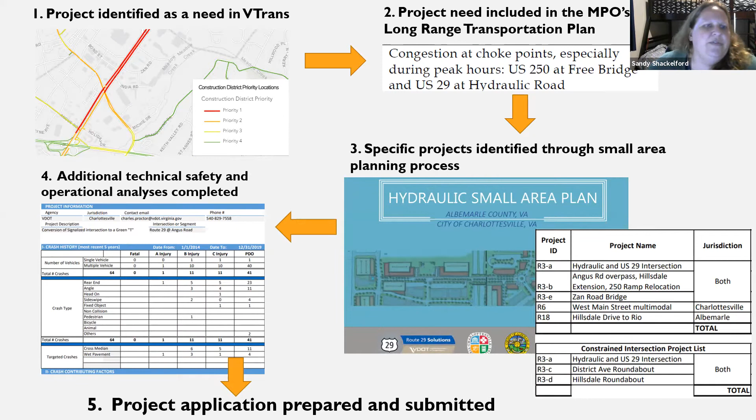After we developed that small area plan, this is just a sample of the type of analysis — this is one part of it, one page of a safety analysis. There were a lot of other analyses completed, and then we were able to submit the project application. So that shows you a project that went through that whole cycle.

Again, looking at our timeline, you've all seen this before — we're in May right now. So what we're doing through you all and with the localities is finalizing the projects we're going to ask the policy board to consider for smart scale applications to be developed. We're going to finalize that list this month, and then in July, during the next policy board meeting, with your recommendations, we're going to ask them to select which projects they want us to move forward with.

Just as a reminder, the MPO has stated it's our policy that we will support up to 2 projects that need a higher level of stakeholder engagement. So it will be up to the policy board in July, with your recommendations and MPO tech's recommendations, to let us know which projects they would like that engagement to occur on.

The other thing I want to mention is there's a possibility, as we consider projects, especially looking at the corridor projects, that maybe we don't want to pick one from each of these categories. Maybe the recommendation to the policy board is that we really want to focus on one of these corridors and do 2 or 3 projects within that one corridor. That's something you all can be considering if you'd like to make that recommendation to the policy board next month.

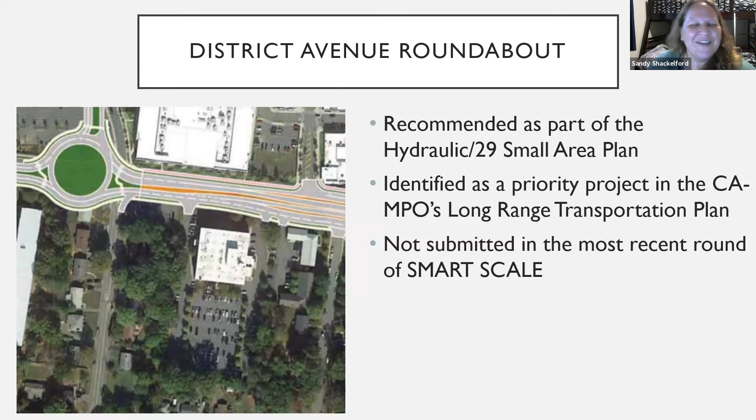No. Okay, we can come back. The second project is the Hillsdale Avenue extension. This would be extending Hillsdale from the current stopping point, over by the Kroger, down to 250, making a direct connection with 250. The other important thing we would be doing is closing these ramps between 250 and 29. So those ramps would not be there, and all of these traffic movements would then be directed through this new connection.

Again, this was one of the projects recommended through the Hydraulic Small Area Plan. It's one of the last projects on the constrained list. This was submitted as an application during our last round. It was the first project that was not recommended for funding, so if there was one more project that could have been funded, this one would have been it.

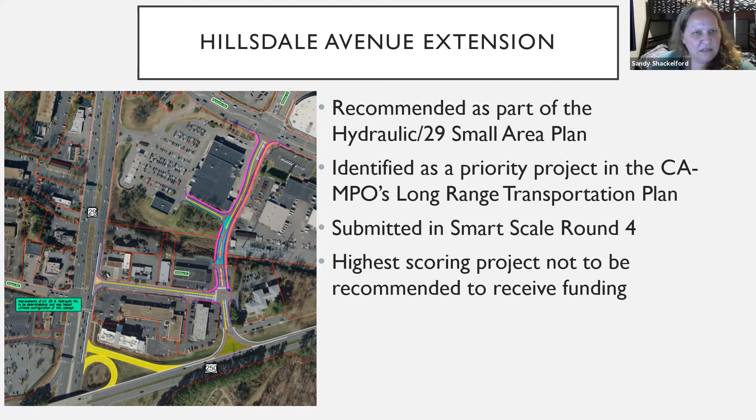All right, and then we get into the Rivanna River Bike and Pedestrian Crossing. I think most of you are aware that we completed a feasibility study last year, funded by VDOT, looking at some potential bridge configurations to provide access from the Woolen Mills area over to the Riverview Park area generally. So these are very rough sketches of potential bridge locations. These were the two potential designs sort of recommended by the technical stakeholder group that reviewed the project options.

For a variety of reasons, if this moves forward as a Smart Scale application, we would be really looking at the configurations, refining the design, and determining how to incorporate any sort of bridge that we feel is the best fit for the community with the larger transportation and pedestrian network.

Chuck or Jessica, anything you want to add on this? I mean, we've got two options. We may be looking at a third option, but the bottom line is we need to hone in on which option we want to go forward with, and then refine that option to give us the best results, taking into consideration some of the other items we might want to look at, especially from the aesthetics perspective, because that can change the cost and feasibility of different concepts.

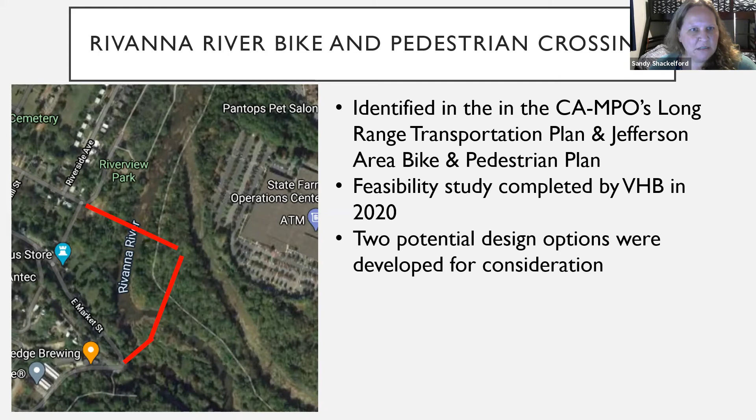And that's part of the process moving forward that you're laying out, Sandy. Yeah, that would be part of what we would have to do as part of the development process to prepare for the application.

So the next project we're looking at, these are less well defined because they're looking at larger stretches of corridors. The first one is the section of Avon Street and Avon Street Extended, basically from Mill Creek Drive at the south end to Monticello Avenue, so it goes from the county well into the city. The city has identified pedestrian and bicycle infrastructure improvements in their bicycle and pedestrian master planning process as a high priority. And Albemarle County just recently completed a corridor study on this in 2020 that identified some additional improvements.

So what we would be doing, if the policy board selected this project and you all recommended this project to move forward, is really looking at what all the recommendations are through that corridor and picking out a package or two or three, depending on the guidance we're given from the policy board, to develop applications that we think would be competitive. So we might be looking at a section of corridor improvements with intersection improvements or something like that, but finding ways to put specific projects together into an application that we believe would be competitive.

One of the questions we were asked at the public workshop was whether we could do one application with all of the projects within this corridor, and we could do that. The challenge, though, is that once we start putting a lot of projects together and looking at longer stretches, it does increase the cost of the application. So we always do this - if you'll recall, Smart Scale is based on the overall benefit score relative to the cost. So we always have to keep that evaluation criteria in mind in order to make sure that we are moving forward projects that are going to be pretty competitive for funding.

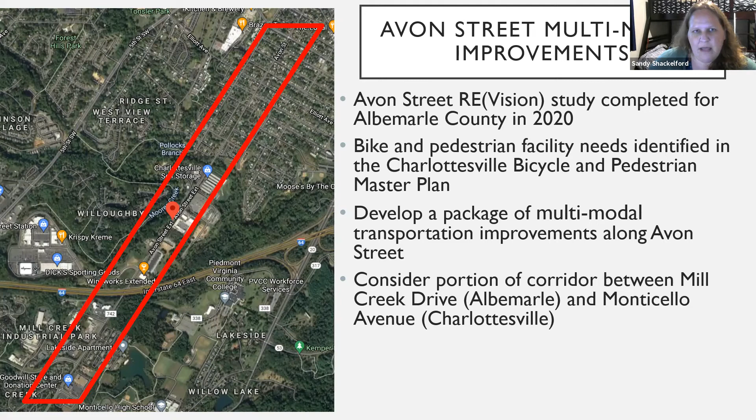And then the last project that has been recommended by staff for consideration is this 5th Street corridor, again looking at starting at the south end in Albemarle County. This is Ambrose Commons Drive. I know this is kind of small text to read, but starting at the south at Ambrose Commons Drive and going up into Charlottesville into Harris Road.

And again, it's the same thing - we would be looking at the entire corridor and putting together a package or two based on the direction that we get from the policy board on creating packages of projects that can be developed into an application. So that is what we are recommending based on that project pipeline that staff discussed when we were developing these recommendations for consideration.

At this point, I'll be happy to answer any questions, or Chuck or Jessica may be able to help as well, as open it up just generally for discussion.

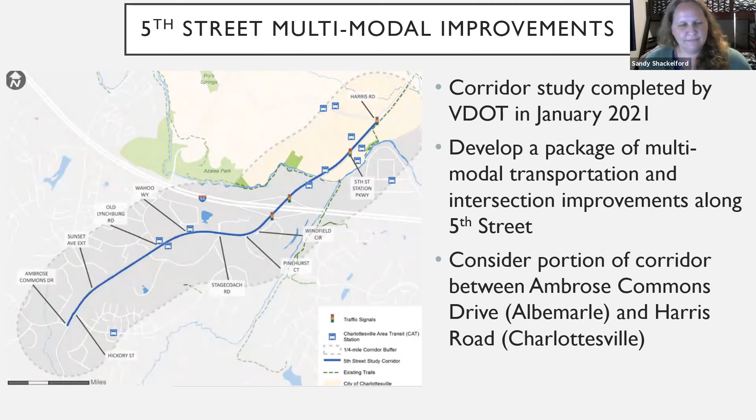Well, I guess I'll mention that I offered a couple of alternatives, and if we could put those up and maybe kick them around a little bit.

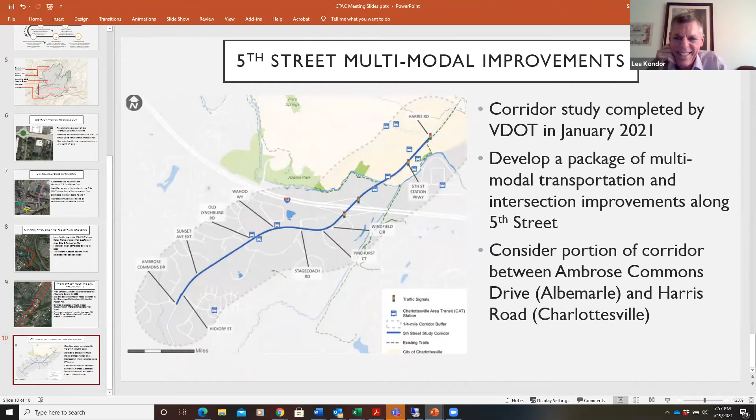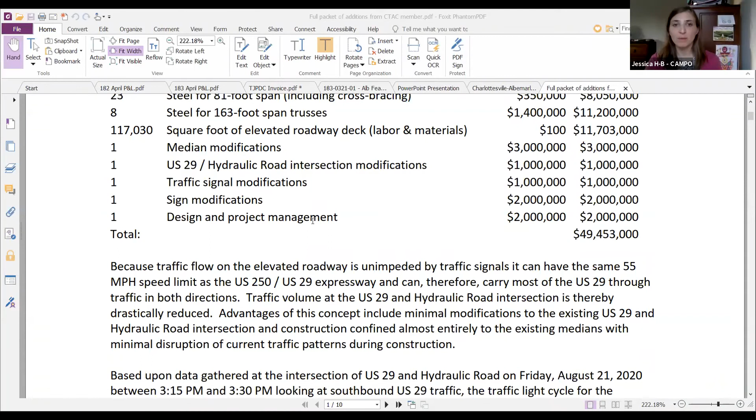Yeah, Sandy, I'm gonna take over the screen so I can share that. Sorry, I thought I stopped sharing already. All right, Lee, you just tell me where to go on here. Do you want me to skip past the narrative and bring you right to your first drawing? Oh, Lee, you're on mute. And while Lee is unmuting himself, I'll just remind you all that this came as a separate packet by email, so you all should have this in your possession if you want to look at it while we're going over it.

Yeah, this is one of several drawings that show an alternative for the US 29 Hydraulic Road situation. As it stands right now, I'll get into the narrative just a bit, but it's already been proposed to spend in the round 4 Smart Scale about $25 million on some changes to the Hydraulic Road intersection, eliminating left turns from Hydraulic onto 29, a roundabout at Hillsdale and Hydraulic, and a couple other modifications farther south on Emmet Street.

And then, as you've just seen, there's two other proposals under consideration this round, the District Avenue roundabout and the extension of Hillsdale. The combination of those two would be, again, in excess of $25 million.

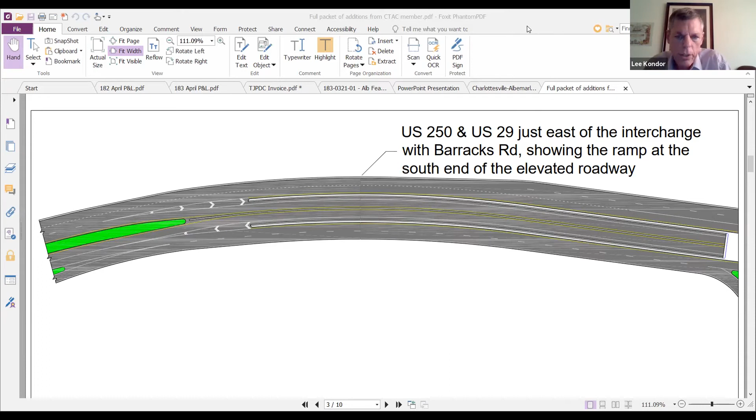So instead of through traffic taking 5 minutes to cover that distance, they could now do it in less than 1 minute. It would take approximately 36,000 average daily traffic count off of that section of US 29, which would then make it possible to have pedestrian crosswalks at Hydraulic Road, for example. It would take a lot of stress off that road and eliminate a lot of the congestion.

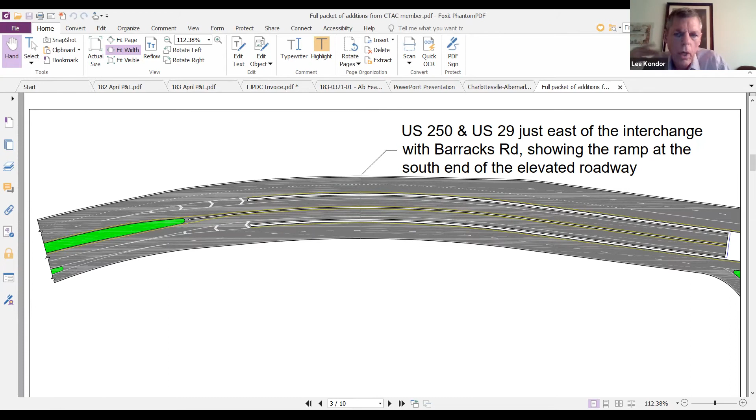So if you could just flip through those, it's a succession of drawings that shows, starting from the south end, what this would look like.

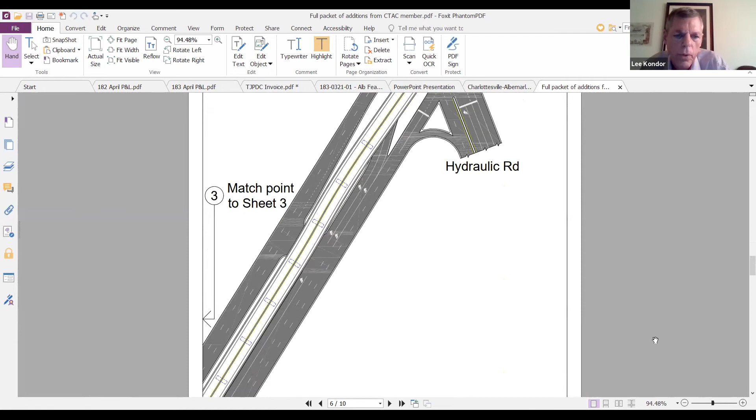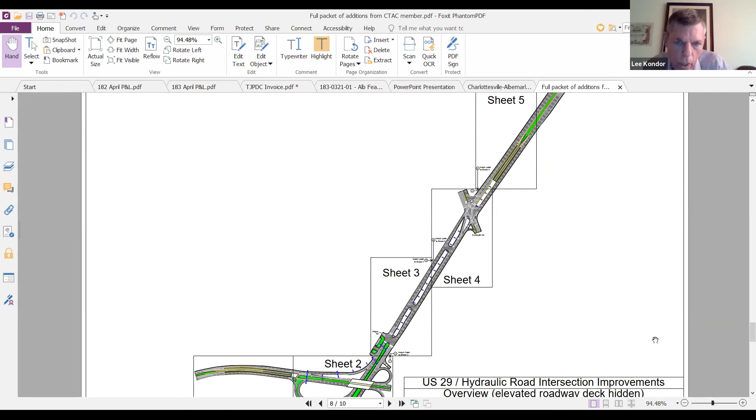Is this an elevated bridge, Lee? Yes, it's one lane in each direction, basically over the median, the current median between the north and southbound lanes. This is where it starts, and the final drawing shows an overall view of the whole thing. At the very top of this drawing was Seminole Court, and at the very bottom is US 250.

There are more drawings to this, some show the elevated roadway, and some have it hidden so you can see the details of what's underneath. Setting aside the funding aspect for the moment, Chuck and I discussed this, and he expressed concern that the city was not in favor of any kind of flyover option, which this would be. So I guess the first thing I wanted to hear from all of you is whether that's in fact true. Would this be a non-starter for some reason, and if so, could somebody tell me what that reason is so I can understand it better?

Again, I looked at the traffic at rush hour at the intersection of Hydraulic and 29 southbound. Changing the light cycle at Hydraulic Road to eliminate left turns from Hydraulic would increase the through traffic green cycle by 12 seconds, taking the current peak capacity of the road for through traffic from 1,300 vehicles per hour to about 1,600 vehicles per hour. But the problem is at peak times you've got 2,800 vehicles per hour, so it doesn't fix the problem. You'll basically have spent $50 million and still have the problem.

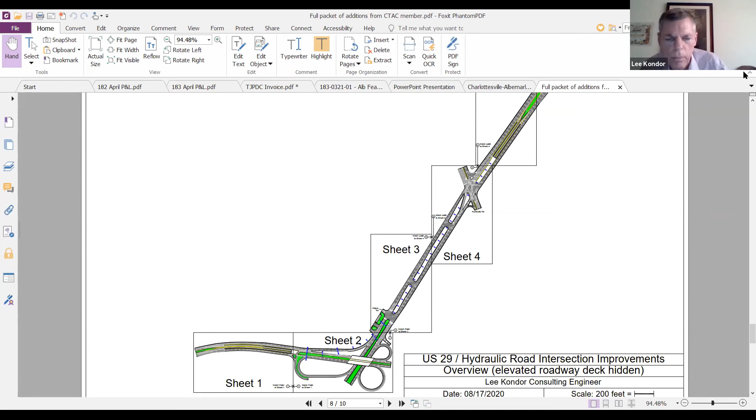So what I've offered, each of those lanes, one southbound and one northbound, can handle 1,800 vehicles per hour in each direction, for a total of 3,600 per hour or 36,000 per day. The current VDOT data on that section of road is 56,000. So it takes the traffic level at the Hydraulic Road intersection from 56,000 vehicles today down to 20,000. And like I say, it spends the same $50 million as proposed to be spent anyway.

So I guess my question is still, is there any of you that knows the reason why you just can't do this? I mean, it's technically feasible, but is there some other reason why it shouldn't be done?

This is Stuart. I would just say the reason I would deprioritize it is, looking at some of the other options, multimodal from Avon Street and 5th Street, I'd rather prioritize things that get you into the city without using a car. I feel like Avon Street and 5th Street do that. They reduce traffic by giving people the opportunity to get into the city on each side of that Wegmans shopping area carless. I think that's a real benefit. I guess that's my comment.

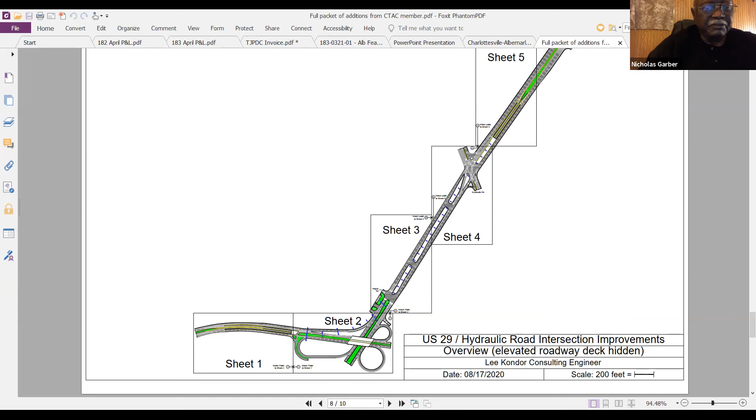Well, like I said, the construction would actually have minimal disruption of the traffic because it's confined to the existing median. Ultimately, it does take one lane out of the existing traffic, so there'd be some inconvenience, but most of it is building the piers, and once the piers are done, you set the bridge section on top. That can be done at night to minimize the disruption. It's actually pretty easy to do this without majorly affecting the traffic, because you're not changing the grade or anything about the existing highway. It stays the same. The traffic lights all stay the same. Nothing gets changed there. So the impact during construction would be pretty minimal.

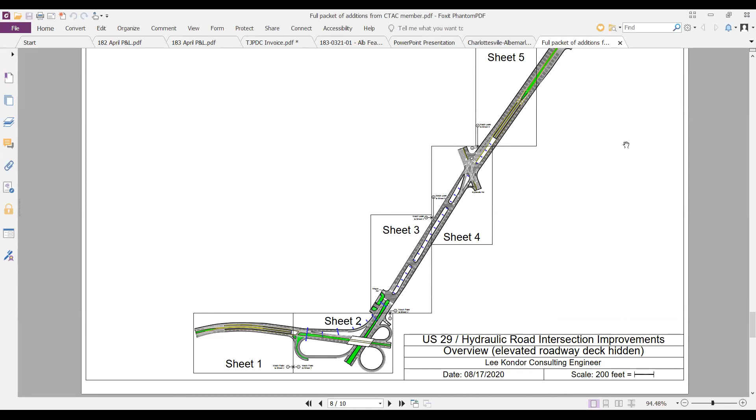It sounds like the larger question is, do we want to focus our resources on easing congestion at a bottleneck, or improving other areas of our community through multimodal pathways? We're at time for this agenda item.

Is there a recommendation from staff? Do we continue talking about this? Is there a process for when someone on CTAC brings a net new idea for evaluating whether or not to bring it to the policy board?

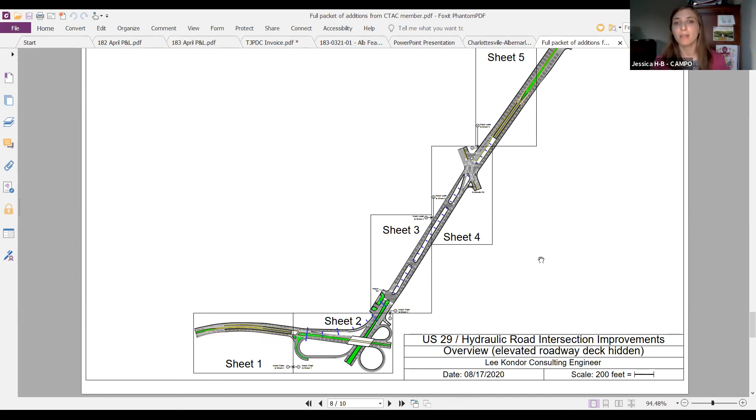Okay, this one's much simpler. I just proposed a different location for the bridge.

As you might recall, of the two proposals, one was a suspension style bridge that ran from Old Mills Trail and terminated at the end of Chesapeake Street. I'm proposing something further north that would terminate on Riverside Avenue. It would require the purchase of one vacant lot at 296 Riverside Avenue, but then the bridge would be level instead of an incline, and it would also keep both ends of the bridge above the floodplain, which neither of the other two proposals did.

I also designed the bridge, so I know what it costs, and I know that it's feasible, as opposed to the other ones, which were pretty sketchy. So it's just a third option to the other two, and that's really all I ask, is that it be considered along with the other two on its merits.

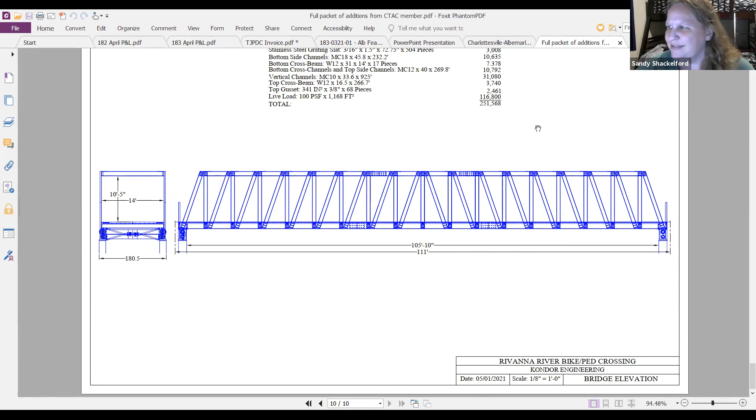Just a quick question, Lee, it looks like you were connecting all the way from that road. Is there any reason, I get the idea of having it level, but is there any reason we couldn't have it closer to the river? Was the floodplain the consideration? Just curious as to why it had to be so long.

Well, yeah, because of the floodplain. That was exactly the problem with option one, the other one, where one section of that suspension bridge was level, but the other section from the west edge of the river down to Chesapeake Street dropped 18 feet in 324 feet of distance, which is actually a greater than 5% grade. So not only does it put the west end of the bridge below the 100-year flood level, but it also makes it more difficult for ADA accessibility, because you go down the hill from the intersection of Riverside Avenue and Chesapeake Street, and then have to climb back up again, whereas this one would go straight across on the level.

And like I say, the individual spans on this are actually quite inexpensive. The total length of the bridge is the same as the proposed suspension bridge, that was over 500 feet, and so is this, and so was option 2 for that matter, that was more than 500 feet of bridge. So in terms of maintenance cost, it's no worse than either of the other two.

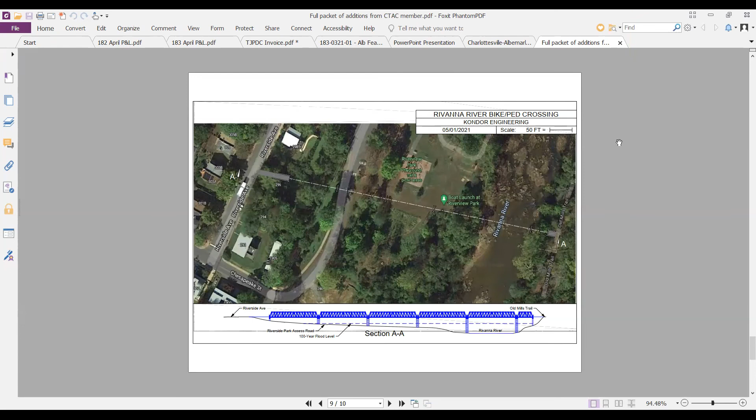Great comment, thank you. We're at 8:27, we still have staff updates to go. It sounds like generally the sense is to bring all 7 projects to the policy board. Unfortunately, I don't think we got to provide comment on 1 through 5, but unless there's any objections, we can keep moving.

Thoughts on that? Sandy, I hope I can volunteer you that if you guys do have comments, please feel free to email me. I will pass them along to Sandy and she can share those comments with the policy board at their meeting. So I am going to quickly share my screen. I want to get you out of here as close to 8:30 as possible.

Hey Jessica, before we move forward, I just want to get clarity. Are those options that Lee brought up going to be part of the next steps? Yes, sure, clear. Sandy, did you want to say anything? Sorry, I was looking for my slides. Because we didn't do a vote, so that's why I asked.

Sandy, did you want to say anything? Okay, sorry. And sorry Jessica, would the comments we made regarding the proposals be included when you pass them along to the policy board? Because a couple about the flyover on 29, I did have some concerns that I raised earlier, so I just want to make sure some of our discussion makes it into that if it's carried forward for consideration.